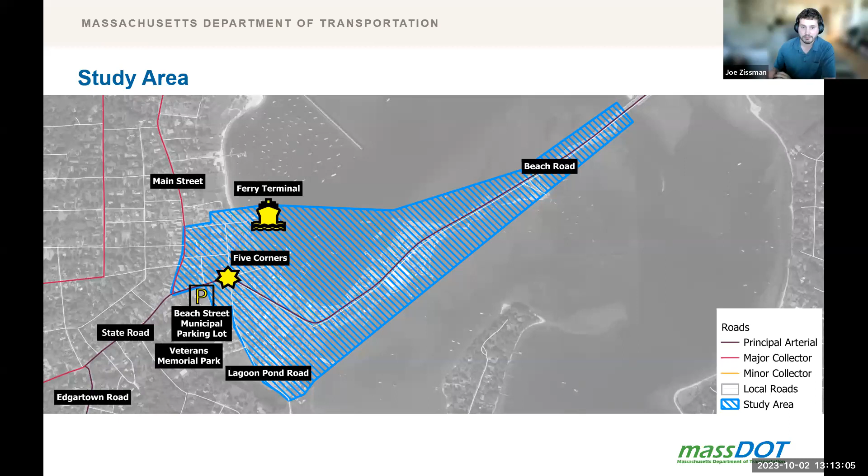Our goal for the project is to develop 3 conceptual plans for the study area with high-level cost estimates. While doing that, we will address current and potential future flooding, and consider the flows of people, vehicles, and cargo through the study area. We will build on work done since 2015 around safety and multimodal operations at 5 Corners and its approaches, and through all of that, engage local stakeholders through this working group and public meetings.

As noted earlier, we made a site visit to Vineyard Haven in early August to observe both physical infrastructure and operational conditions during the height of tourism season. We'll go through observations made during that visit, backed up with additional research once we got home.

We'll begin with pedestrian and bicycle conditions. It's important to note that as we begin discussing traffic flows, all of these were measured in 2013. However, we can confirm, certainly with our own observations, the high volume of pedestrians that flow through the study area.

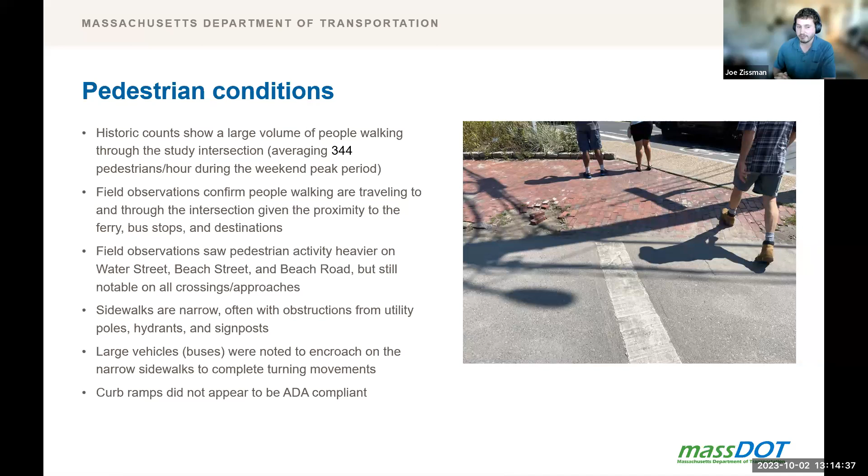It's important to note that the infrastructure is not entirely pedestrian friendly in the study area. Not only did curb ramps not appear to be ADA compliant in some cases, they were not always aligned with crosswalks. In addition, we observed large vehicles encroaching on the sidewalk on the northwest corner of 5 Corners on several occasions. We'll come back to that with a map in a couple of slides.

The traffic volumes that we are presenting here have been projected from 2013 to 2023 using a MassDOT 1% per year growth rate. The following slides will present this information primarily in terms of turning movement shares, so the percentage of vehicles coming into the intersection from each of the entrance points that are continuing straight or making the various turns available to them. Because the growth rate was 1% for everything, the percentages of the total flow are the same as they were observed in 2013.

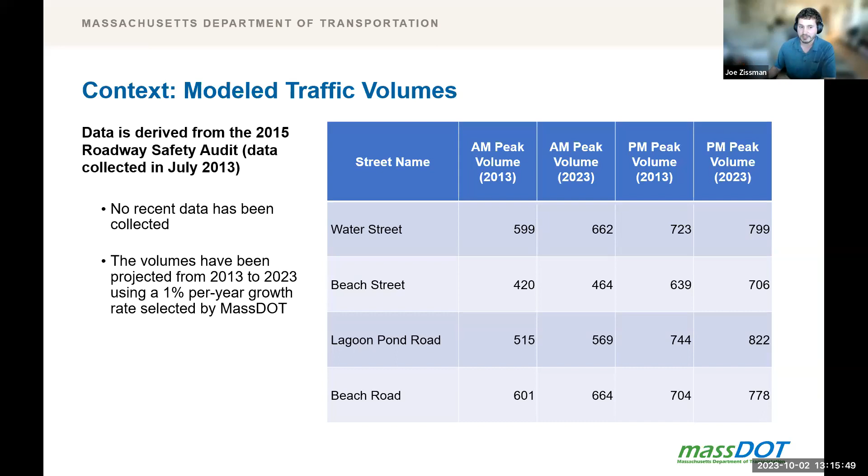We're now looking at the Saturday peak. We have two slides here: one for weekdays, which was the last one covering all of them, and this one for Saturday alone. The Water Street approach sees somewhat less volume on Saturdays. The other approaches remain essentially constant with the traffic they see on weekdays. The Beach Road and Beach Street approaches perform similarly to each other. Even a greater percentage of volume continues straight, and about 10% less of the volume turns onto Water Street relative to the weekday.

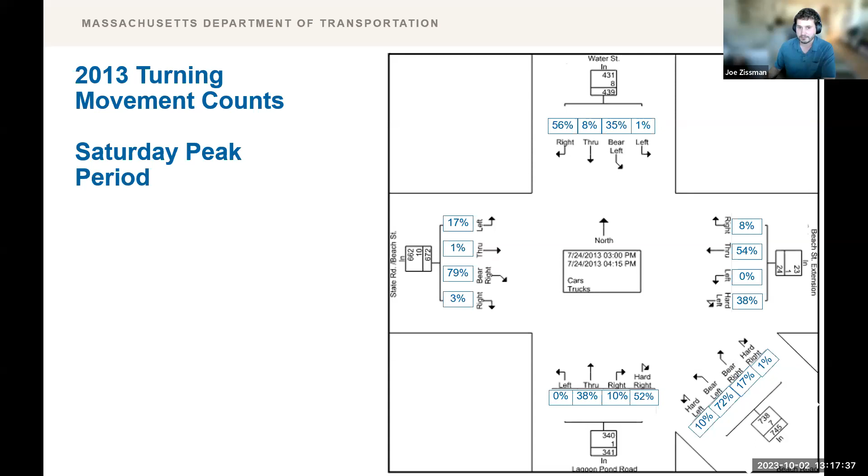So now we return to the conditions as they exist in 2023, starting with sightlines. We performed a sight distance analysis during our site visit in August. We did it for all of the approaches for Five Corners and also for the intersection of Beach Street and Main Street. The procedure was to stand at the stop line of the intersection and mark the distance to a point around the corner at the distance where you lose visibility of what would be an approaching car—generally by having someone stand there and walk backwards until you can't see them anymore.

Having done that for all the approaches and all the turns at those two intersections, at most corners the sight distances meet minimum standards. The one exception is the sharp right from Lagoon Pond Road onto Beach Road, shown on the slide with the yellow arrow—it is blocked by the bike shop. It's worth noting that even though the sight distance analysis was performed relative to what you would see when stopped at the stop line, observation of the intersection using the overhead camera, and our own in-person observations, show that many vehicles making a turn actually creep into the intersection beyond the stop line to view and potentially interact with other traffic before they make the turn.

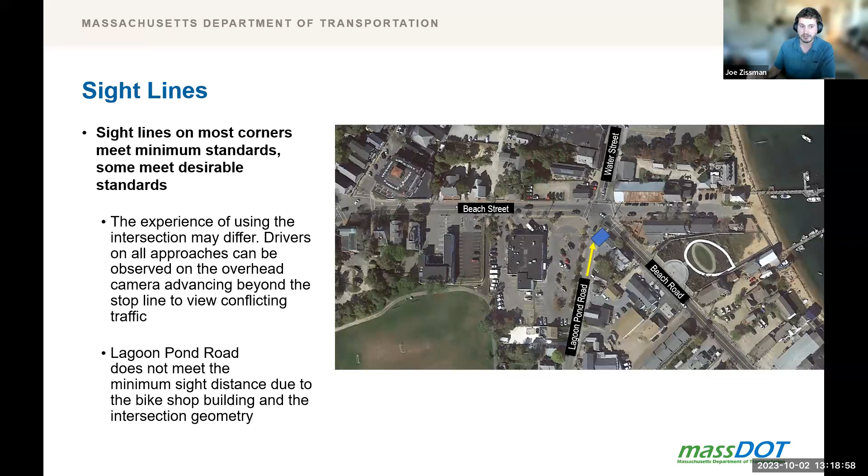As noted earlier, during our site visit, we observed many instances where a large, long vehicle, such as a bus or truck, could not make the turn from Beach Street to Water Street or vice versa. We show the Water Street to Beach Street right-hand turn here; it's also an issue with the left-hand turn that goes the other way. In these cases, those vehicles might encroach on the sidewalk. They also may encroach on opposing lanes of traffic, and we observed vehicles backing up from the intersection to make room for a bus or truck that needed to turn. Again, this is observable on the overhead camera.

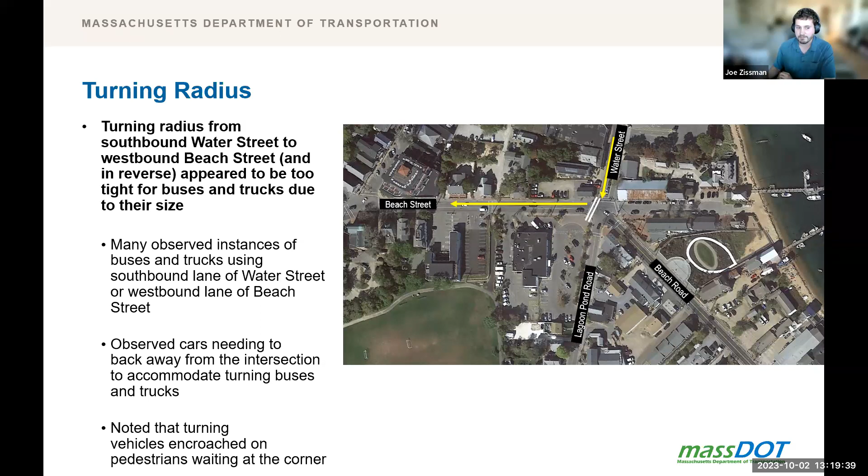As a final observation from our site visit, the current design of Lagoon Pond Road northbound encourages speed. There are limited and low-volume curb cuts. There is no on-street parking to create friction, and the approach is perfectly straight.

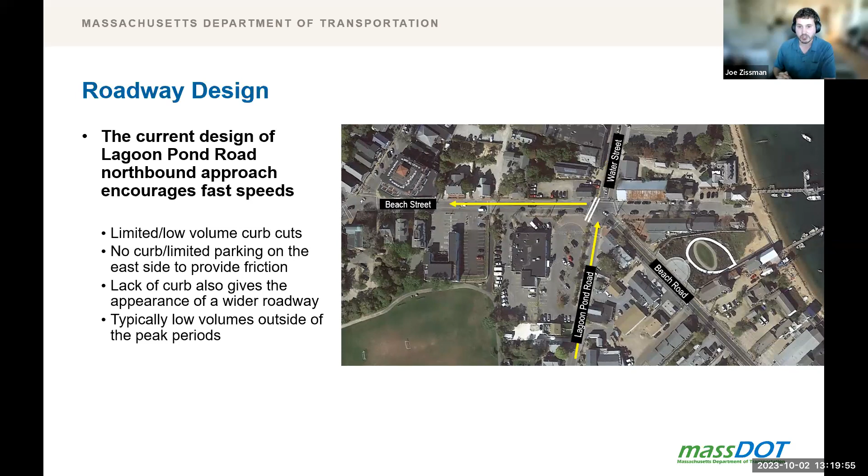In addition to our site visit, our team has analyzed crash data from the past 5 years, 2018 through 2022, for the study area encompassing Five Corners and several other intersections.

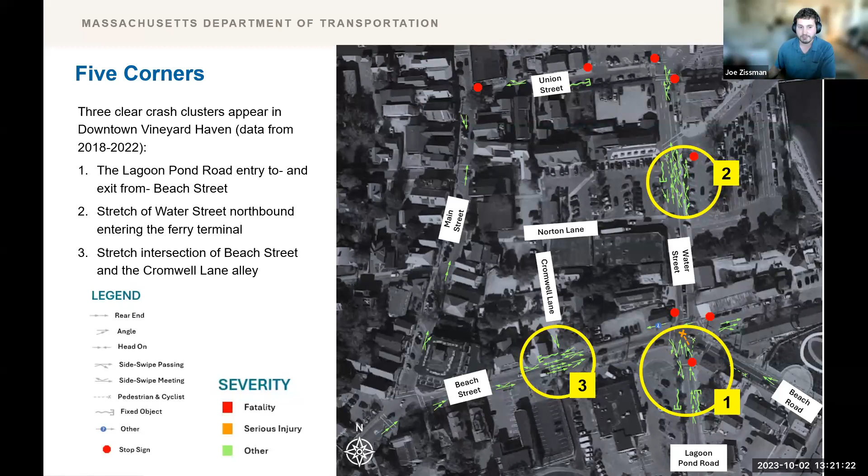We'll pause to explain the map. Each neon green, orange, or red line indicates an incident, a crash - fortunately we don't see many orange or red ones here. The type of crash is indicated by how those arrows interact with each other. A legend is displayed on the slide and will be consistent over the next 2 slides. Where there's a cluster of thin green, yellow, orange, or red lines is self-evidently where a crash cluster occurs.

Continuing into the southern area of the study area, there is a 4th crash cluster, labeled number 4, on the western side of the bend in Beach Road. It actually exists in both directions, whether you're going into the curve or coming out of it.

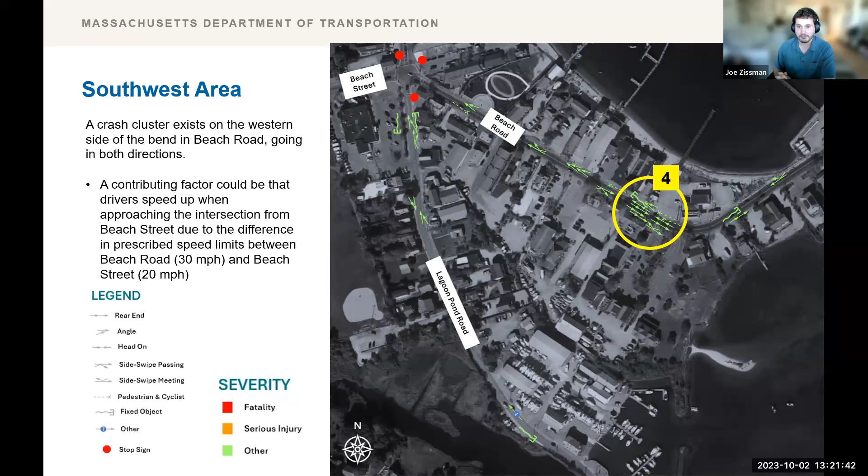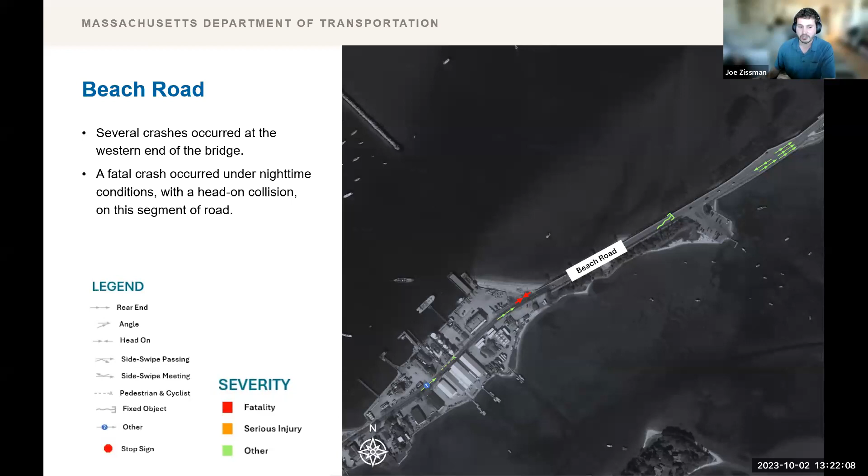While not qualifying as a cluster, several crashes also occurred at the western end of the Lagoon Pond Bridge along Beach Road. It's also important to note that the only fatality in the study area between 2018 and 2022 occurred on this segment of road, in a head-on collision during nighttime conditions.

In addition to safety and operations of the roads in the study area, the project is also meant to focus on flood vulnerability and the ways infrastructure could be designed to protect access and property.

The study area is located by the coast and has a relatively low elevation - actually a very low elevation. Five Corners and stretches of Beach Road, Lagoon Pond Road, Beach Street, and Water Street have an elevation between 2 and 4 feet; some segments have elevations of less than 2 feet. Based on sea level rise projections from the 2022 Massachusetts Climate Change Assessment, the mean sea level of the study area is projected to be 1.2 feet in 2030, 2.5 feet in 2050, and 4.3 feet in 2070.

If you pair those off, the low elevation of the study area makes it vulnerable to frequent tidal flooding. Five Corners and a majority of its adjacent roads and properties would be inundated with something like 3+ feet of sea level rise, projected to happen by 2070.

In addition to the impact from static sea level inundation, the dynamic of tides, waves, and storm surge are also evaluated using inputs from simulations in the Massachusetts Coast Flood Risk Model. What we're looking at on the right side of the slide is a result from the dynamic simulation of a statistically robust set of variable coastal storm surge conditions that produce spatially distributed flood probabilities. The colors on the map indicate the probability of floodwater inundating the land surface at a particular location.

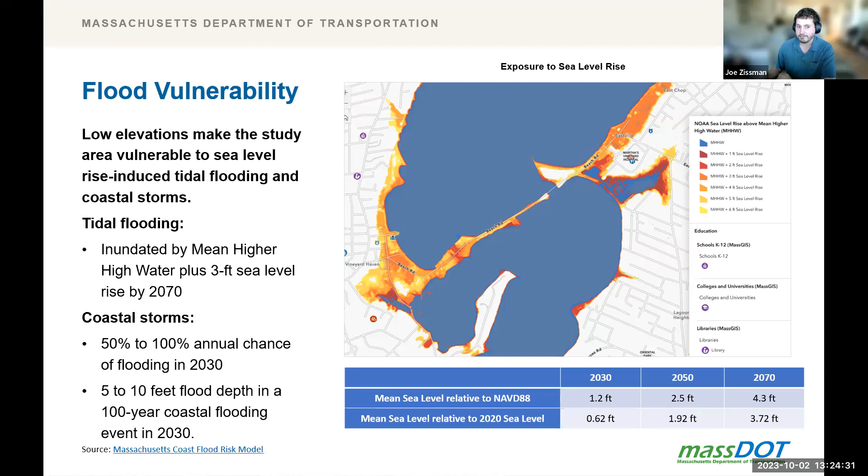Another angle of vulnerability is drainage and stormwater management. One challenge for draining this area is that the only outfall for Five Corners is located at the foot of Beach Road Extension, where wave-borne debris can block it. As shown on the map, other outfalls exist but are not connected to Five Corners.

There was discussion during the last working group meeting as to whether an alternative outfall location could be found. One challenge is that Five Corners is the low point of the entire area, with a substantial slope on Beach Street leading to it and upward slopes from it along all approaches, which limits the ability to direct water from Five Corners to other potential outfalls. It's also important to note that in addition to MassDOT's project, the town of Tisbury is considering various drainage solutions for Veterans Park.

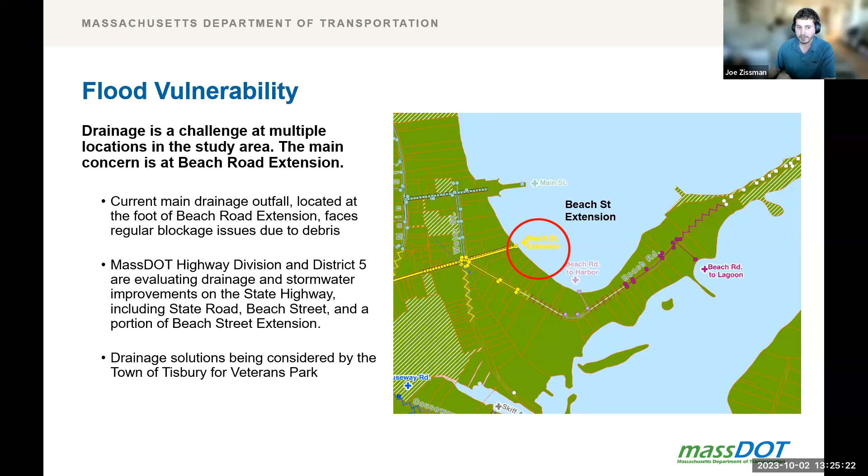So a note about our next steps. We are currently at number 3 of this 5-step process. Following this meeting, we will begin to develop conceptual design alternatives. We will conduct a public meeting in November, and our final touch points, both with you and with the public, will come in the winter and early next year. And I will hand back to Patrick to begin to facilitate the discussion.